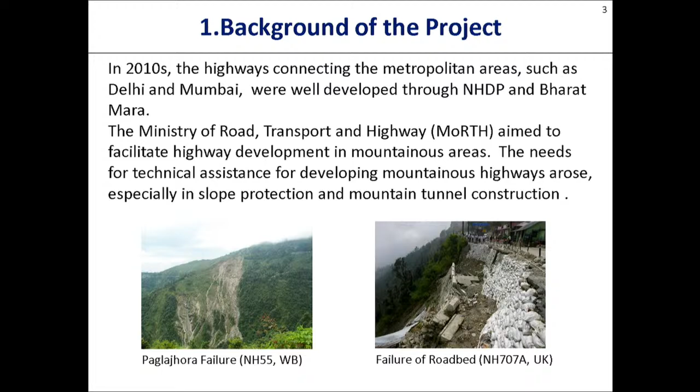This is the abstract of the previous project. Name is Capacity Development Project of Highways in Mountainous Region. Duration was 6 years, from April 2016.

That was extended by 1 year due to the pandemic of COVID-19. The project was implemented by JICA and MORTH, Ministry of Road Transport and Highway, as a technical cooperation for development of mountainous highways. In total, 17 JICA experts were involved along with Indian counterparts, and I was team leader of this project as well.

We developed 5 guidelines for development of mountainous highway roads in India, and we also implemented model activities, including seminars and pilot projects, in 3 hill road projects.

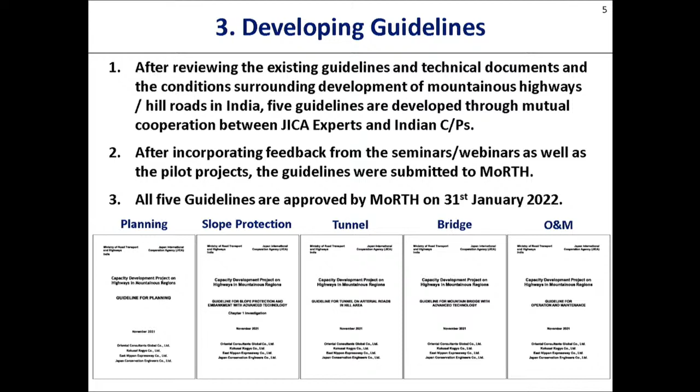These are the guidelines we developed with our Indian counterparts. After reviewing the existing guidelines, technical documents, and conditions surrounding development of mountainous highways in India, 5 guidelines were developed. After drafting, we had a series of seminars and webinars to collect feedback from the Indian side, and we submitted the guidelines to MoRTH. All 5 guidelines were approved by MoRTH on 31st January this year.

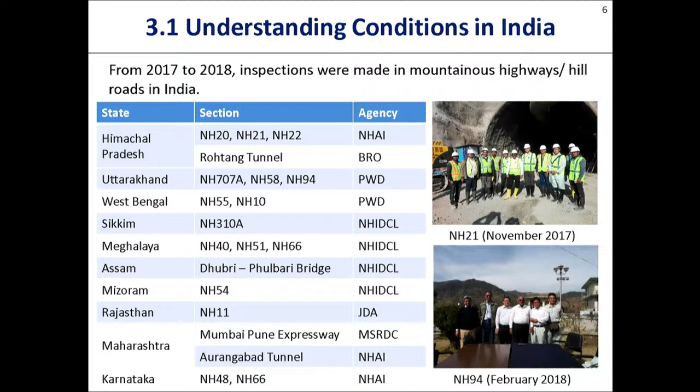JICA guidelines include essential technology for development of resilient mountainous highways, grown in the disaster-rich nation of Japan. We have earthquakes, tsunamis, avalanches, and volcanoes—many disasters. So our technology incorporates a sense of disaster-resilient design.

The first one was the planning guideline, aimed to improve existing guidelines, especially on alignment design as well as drainage facilities. The second guideline is the mountain tunnel guideline.

This aims to introduce reinforcement works to counter the fragile and complex geological structure in the Himalayan region. This guideline highlights rock mass classification for tunnel support design for the NATM method, and also focuses on guidance on safety precautions and tunnel facilities, including lighting, ventilation, and electric systems.

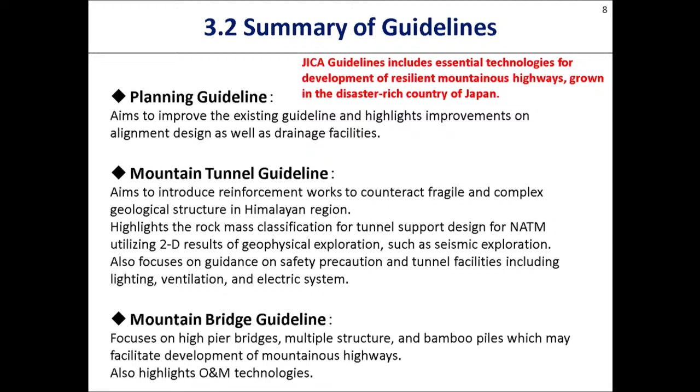The third is the mountain bridge guideline. This focuses on high pier bridges, multiple structures, and bamboo piles, which may be used for highway development.

The fourth is the slope protection guideline. This guideline aims to supplement the existing guidelines in India, focusing on slope failure and landslide issues along hill roads, especially study and investigation for design of countermeasures. This guideline highlighted countermeasures against sinking sections, especially for gravity deformation bedrock slopes, which are considered one of the major causes of sinking hill roads.

The fifth guideline is the operation and maintenance guideline for mountainous highways. This shows guidance on operation and maintenance, highlighting inspection of roadside structures, standard thresholds for operation and maintenance, arrangements and operation of disaster prevention facilities of tunnels, and the concept of an early warning system for pre-closure of roads as a precaution against disastrous weather conditions.

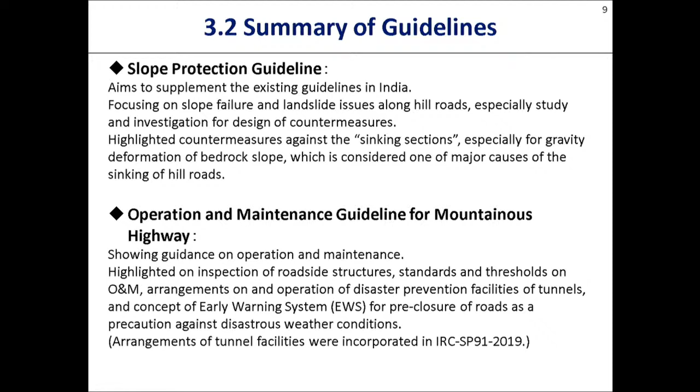Among the 5 guidelines, today I'd like to focus on 2: the tunnel guideline and the slope guideline. For the tunnel guideline, when we prepared it, there was some room for improvement in India as of 2016.

At that time, India had experience in good conditions only, and didn't have much experience with difficult tunnels, excluding Rohtang Tunnel. To counteract difficult conditions, like tunneling through the Himalayas, the tunnel guideline showed some supplemental measures against difficult conditions such as fracture zones, shear zones, and abrupt water ingress.

All of this is in our guideline. Also, design and construction without NATM theory was a room for improvement at that time, so our guideline focuses on NATM. Additionally, some problems at the portal zone were observed at that time, so our tunnel guideline focuses on portal issues as well.

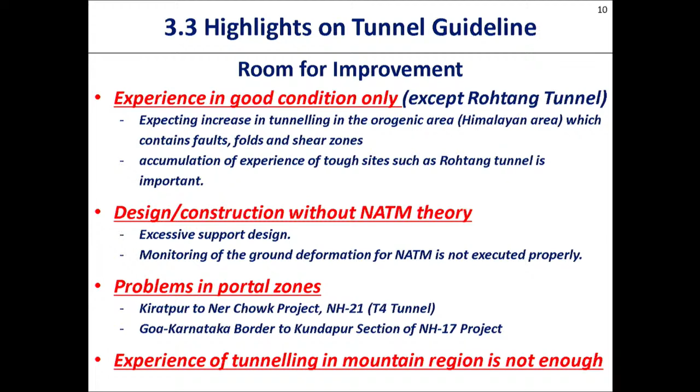And the tunnel guideline also includes safety and health during tunnel construction issues. So during tunnel construction, there are some problems on the left-hand side and measures to be taken. These measures are also included in IRC SP 91 2019, but our guideline has more details, especially for the red-colored part, like safety inspection, emergency operation plan, and labor education.

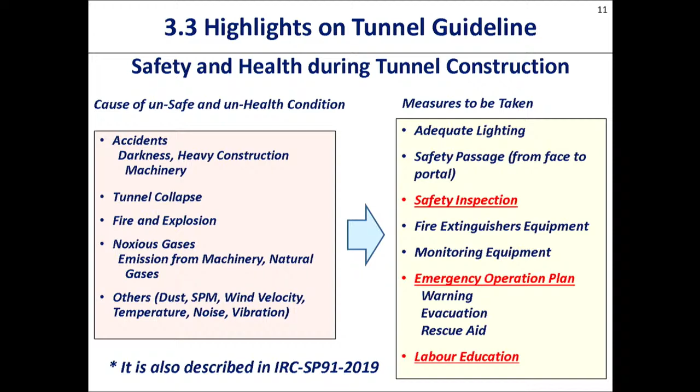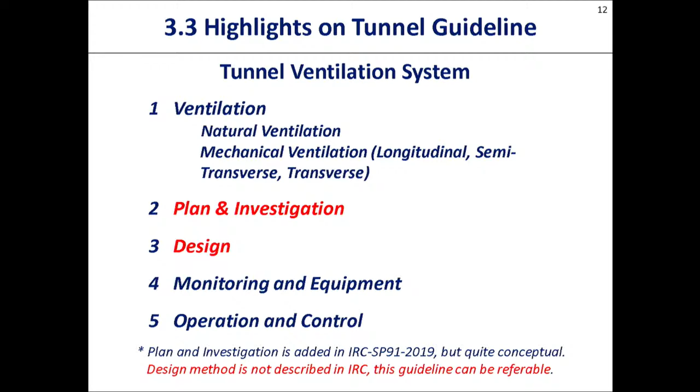Our JICA guideline also focuses on tunnel ventilation system, and these ideas are also included in IRC SP 91 2019. I think this is for the tunnel guideline's design method, and IRC SP 91 has the concept of these ideas, but JICA tunnel guideline has more detail, especially for design method. So I think JICA tunnel guideline will be a very nice supplement for IRC SP 91.

Okay, I want to explain about the slope guideline. JICA slope guideline is another important guideline among those we prepared. Actually, JICA experts came to India from 2016, and we found Indian hill roads are so challenging. We think the reason why you have such challenging roads is...

Yes, you have the Himalayas. The Himalaya is a very special condition, including the forefront mountains. This is a very specific, particular condition we can see only in India.

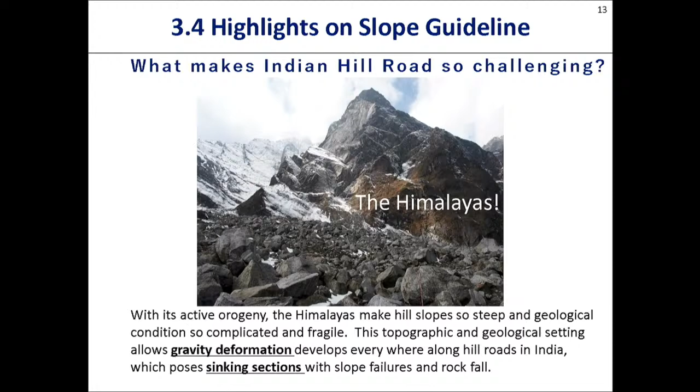And through the site survey, Indian counterparts told us that you have a sinking section, a very difficult part in operation and maintenance of hill roads. Then we looked through the hill road and proposed that gravity deformation of rock slope can be a cause of sinking section. Due to gravity deformation, there are so many slope failures, not just at the sinking section. That is what we propose in the JICA slope protection guideline.

This is just a summary of the contents of the guideline, actually features of the guideline. The JICA slope guideline adds new technologies to the existing guideline, as additional supplementary information for India. Gravity deformation is highlighted because we think it's a major cause of sinking section.

Conditions for slope stability analysis are detailed for various types of landslide. This is another interesting part in our JICA slope guideline, but I don't touch this point today - please check our JICA guidelines. Then concrete crib works and horizontal drainage borings are highlighted. These are new technologies from Japan, and this technology was tried in a pilot project in Sikkim.

Especially, we focused on investigation and study for design, because in India you have good consultants and good contractors who can make good roads already - construction-wise no problem, design-wise no problem. But we think the Indian road sector might want to improve the survey and investigation of hill roads.

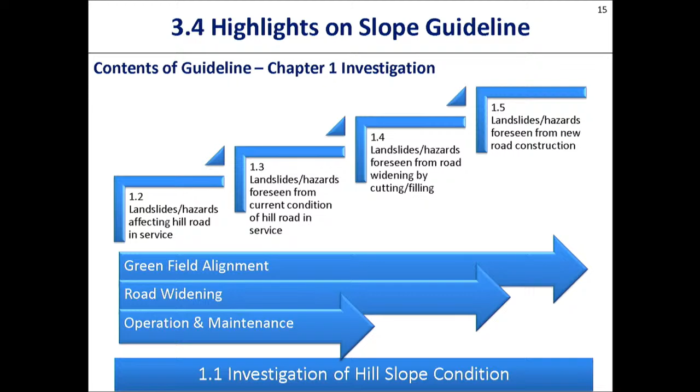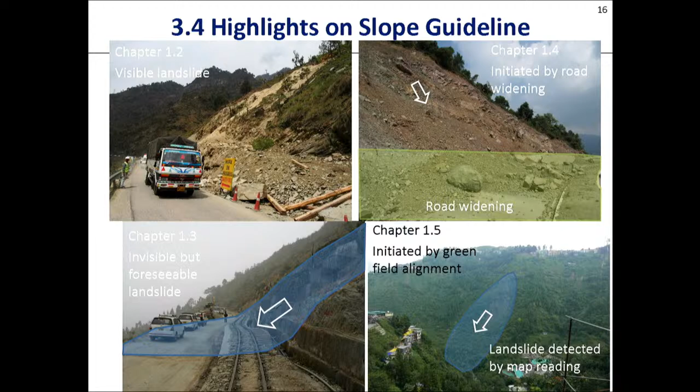Now I want to touch on sinking section. The very first time I came to India for this particular project, we had discussion with the Indian counterparts, and most of the engineers told us sinking section of hill road is a problem. We looked into what sinking section is, and we think gravity deformation of bedrock slope is one of the major causes of sinking section. So a pilot project was implemented for NH54 and 717, including investigation of gravity deformation.

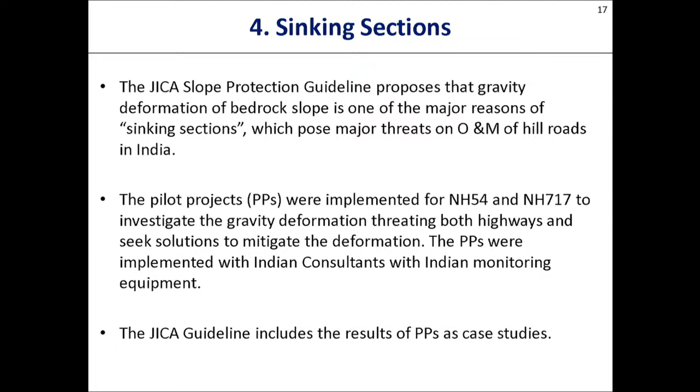We try to seek solutions to mitigate gravity deformation, because gravity deformation is a very new phenomenon to Japan as well. Even in Japan, we have not yet established the investigation method or countermeasure method against gravity deformation. So we try to seek solutions with our Indian counterpart in this particular JICA technical cooperation project, and our trial and error was recorded as a case study of the project and included in the JICA slope guideline.

Next, please. I want to explain what gravity deformation is and why hill roads sink. Gravity deformation is sometimes called gravitational deformation of rock slope, and that is a phenomenon where a rock slope with very steep bedrock...

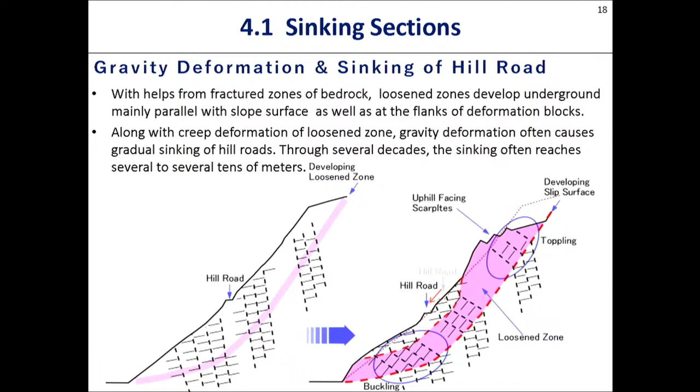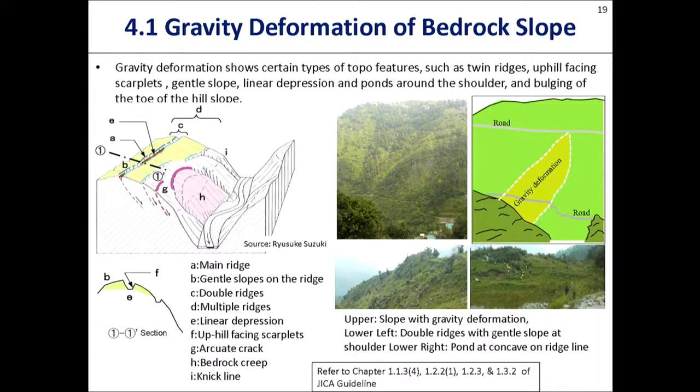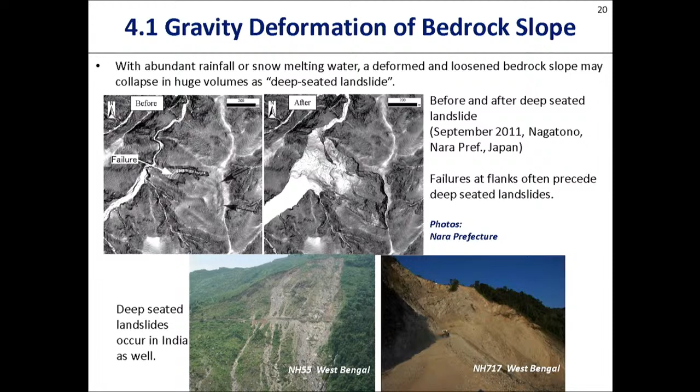Next, please. We prepared a reference on gravity deformation in this particular project, and we added this reference to our JICA slope guideline. We collected study results from Japan regarding gravity deformation, because we tried to explain what gravity deformation is, and shared the latest study results from Japan with the Indian side. This is attached to the JICA slope guideline as appendix 2 or 3.

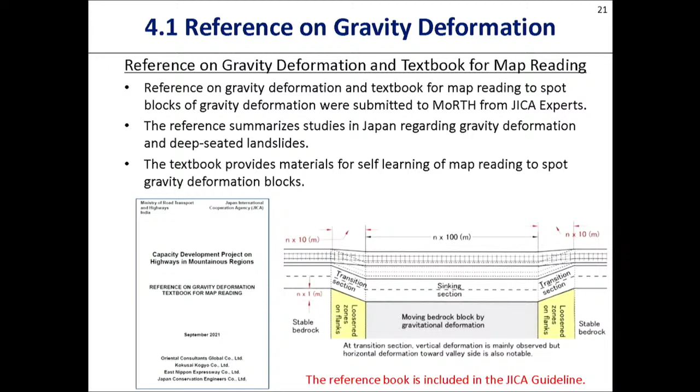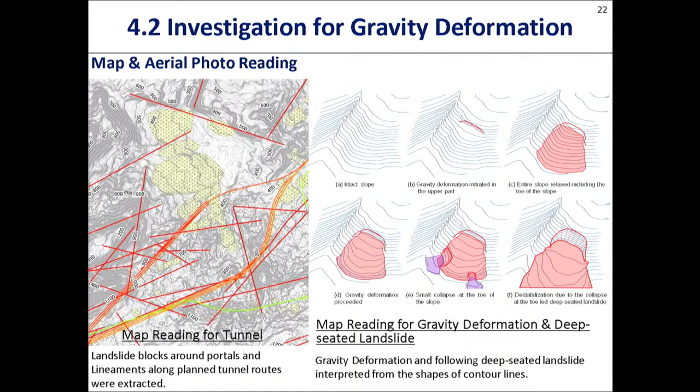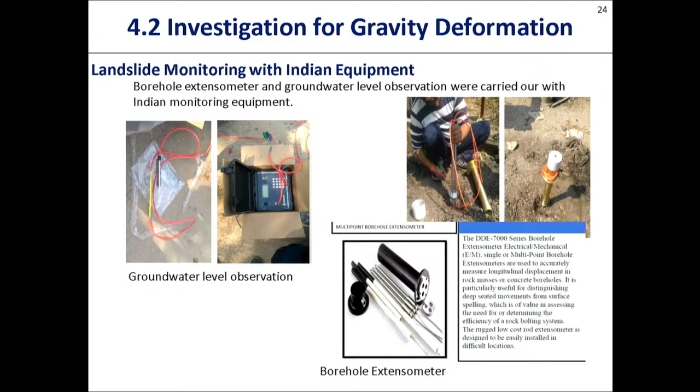And monitoring was also done. This is also very simple monitoring for detecting gravity deformation, and this is also included in the JICA guideline. The monitoring result - this slide explains the monitoring result - this is very essential information for the design of countermeasures.

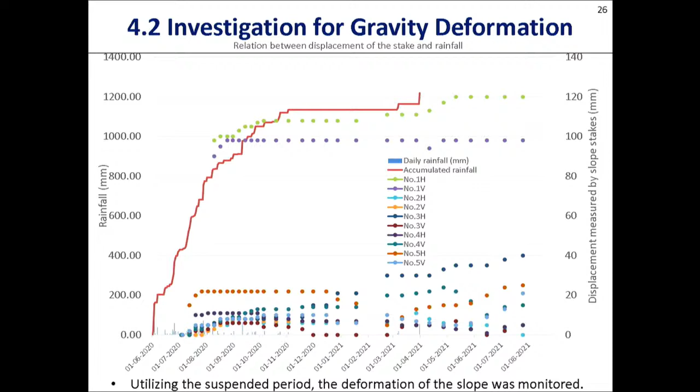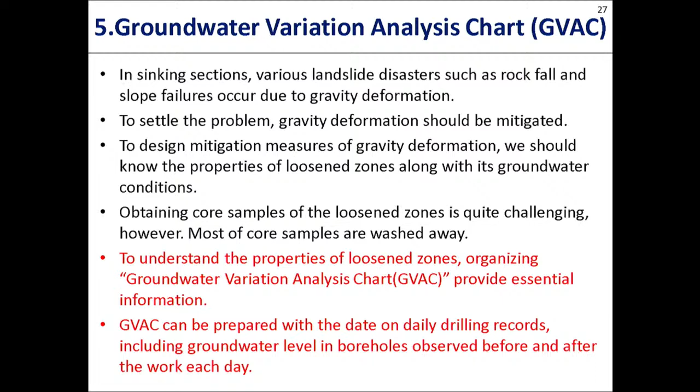But with this method, GVAC, you can estimate the condition of the loosened zone by observing the groundwater level every day, every morning and every evening of the working day. Next, please. This is an example of GVAC used in Japan, shown in our guideline. Next, this is a GVAC prepared by an Indian consultant based on our guideline - they themselves prepared this.

We give some suggestions, some advice, but they prepared this. So with this information, we can do some design for countermeasures against gravity deformation. This is very good, nice work by the Indian consultant.

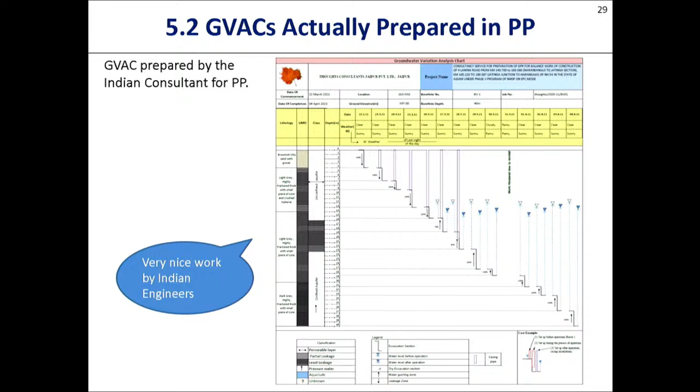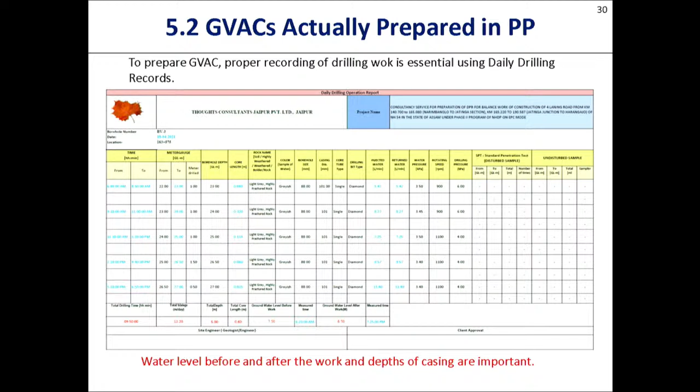So we requested the government to extend the borehole length to detect groundwater level, because detecting groundwater level is essential, very crucial, to understand the loosened zone. So the company drilled further to get the groundwater level. Such control of drilling is very important to get this GVAC for the design. Thank you so much.

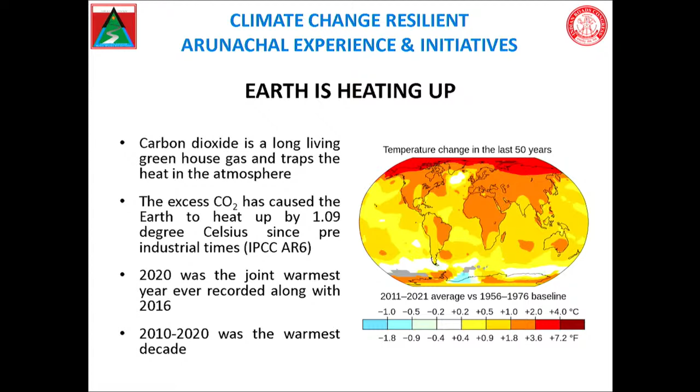Next please. Looking at the northeastern states and climate change, we've been observing that rain is the major source of water here, and glaciers are not common. The rainfall pattern, especially during monsoon, keeps changing. Over the last 22 years, rainfall has been below normal, with intermittent rain, high rain, and cloudbursts.

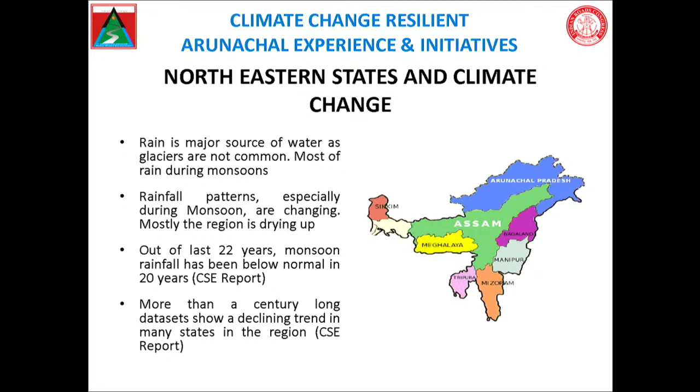If you see the CSE report, some districts show very high rainfall, but most districts across the whole northeast show a decline. Looking at over a century of data, it shows a declining trend in many northeastern states.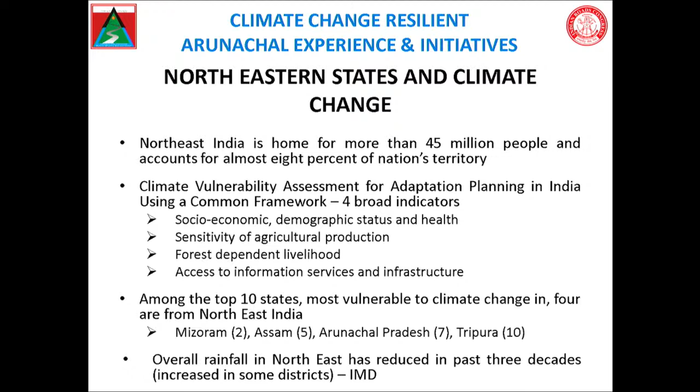Next please. Looking at the climate of the northeast, the rainfall pattern has considerably changed. There are periods with no rain, basically drought. Temperature is rising, rainfall intensity is increasing, there's a reduction in temporal spread, and winter rain - the northeast monsoon - is declining. The soil along the Brahmaputra is mostly sandy, and water retention capacity is low.

This creates a fear of scarcity, and the government is also thinking about and working on that in the whole northeastern region. The drying of mountain springs, as per the Niti Aayog report, shows 200 springs are directly the primary source of water for mountainous villages, and they are also gradually drying up.

If we see the mountain regions, Sikkim has over 94% of villages with mountain springs. In Meghalaya, Mizoram and Manipur, considerably 55, 54 and 54%. And Nagaland and Arunachal have around 44 and 37.3%, because we are dependent on that.

So if the springs are drying up, we will have a big problem for the water supply and all. So we have to also look forward to how basically we can ensure these sources continue to be there, so that we can tap and harness the water.

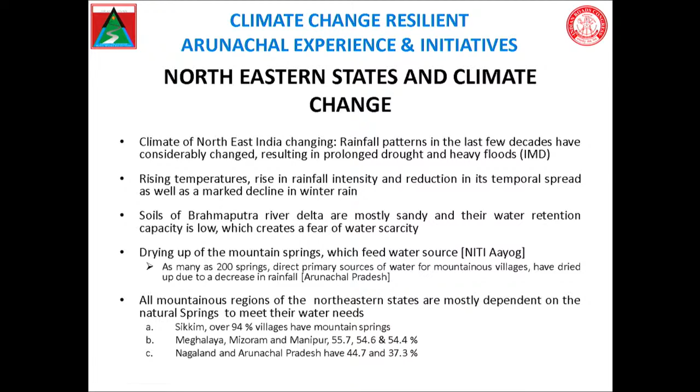When we look at Arunachal and climate change, these are some of the threats I have just described. We rank 7th in high vulnerability among Indian states. We have increasing frequency and high intensity of extreme rainfall, which I have just mentioned, and recurrent landslides, very common now.

In fact, last week there was a very heavy landslide in the central part of Arunachal Pradesh where we have a lot of damage taken place. Heavy soil erosion, flash floods, and of course the adversity impacting the overall economy of the state.

We have frequent droughts, and 26% of our GDP from Arunachal Pradesh comes from climate-sensitive agriculture. This is a very important aspect for the threats and vulnerability. 77% of the rural population directly and indirectly depends on agriculture production in the state.

When the temperature also rises, there are implications for water resources, agriculture, forest ecosystems, and infrastructure among others, as per our NECCAP report, which is being worked on under the Ministry of DoNER. We have some strengths which I have highlighted here.

We have the largest forest cover, and the largest carbon stock, which is 1023.84 million as per the ISFR report. We have huge hydropower potential of 57,000 megawatts; 815 is already operational, and 2600 megawatts is under construction. Arunachal has also aligned its state budgetary allocation with the Sustainable Development Goals described by the UN.

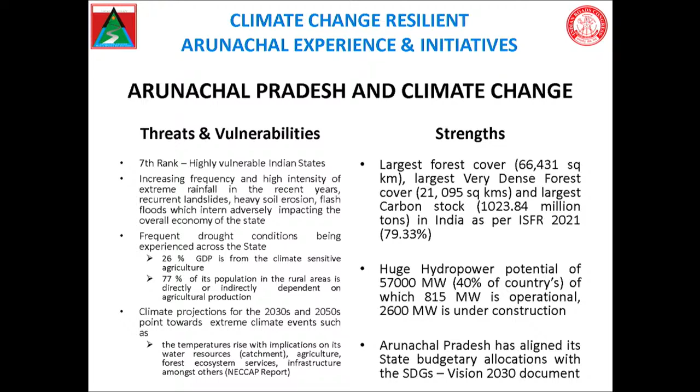So these are also basically what we are considering if we see the Vision 2030 document. Now coming to one of the districts, Pakke Kessang, which is in the central part of Arunachal Pradesh - what are the changes that have taken place?

Microclimatic changes - we see the Pakke Tiger Reserve in Seijosa, where sand and boulder mining is going on. The Pakke river width has increased after a devastating flood.

There are some more rivers which have been meandering, and their width has also increased - they were earlier flowing around 5 to 10 meters, now they have gone to 20 to 30 meters. So they are all damaging nearby villages, habitation, agricultural land - everything. This is another main concern for all of us.

Many rare species, like the Blyth's kingfisher, are dwindling and not available - this is also the impact of climate change. The movement of elephants within the reserve corridor has been changed. We have been observing the elephant corridors - different corridors are there, but they are being changed because of various factors, including deforestation and all.

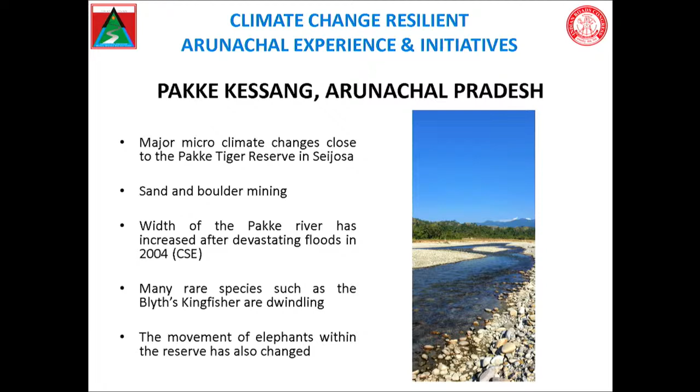Another district called West Kameng, in the western part of Arunachal Pradesh. When you travel to Tawang, there is this district, West Kameng, and construction of a highway in the district has affected the health of springs.

There are human interventions, and 10 springs from the foothill areas called Bhalukpong at the Assam-Arunachal border, up to Morgung village in West Kameng district, had dried up. And what are the reasons for that? The reasons we are explaining, and climate change is one of them.

Singchung village is witnessing some major changes to biodiversity and climate indicators due to climate change. This is what we are observing. This is one village where we keep on observing, and I have also kept visiting these areas.

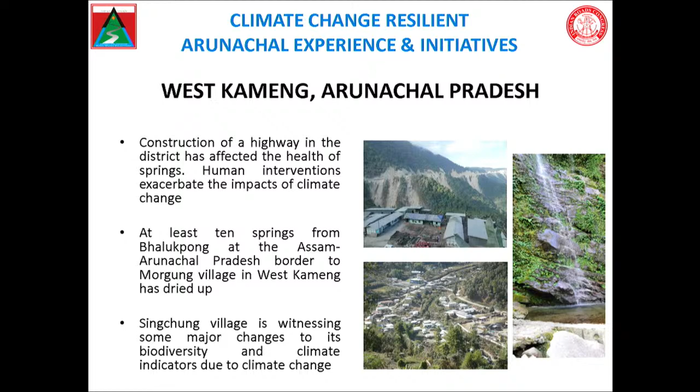Now, what infrastructure is at risk? What I've been talking about yesterday in the inaugural function - we have all talked about the infrastructure and why it is at risk, and how possibly we can take care of this infrastructure.

The roads, bridges and culverts, which we have been discussing and deliberating here in the 3-day IRC conference, are the most susceptible to increased runoff during major storm events during the monsoon rain. Intensity is increasing. Structure failures are there because of washout, plugging, overtopping, diversion, scouring - all these are happening. So our structures are failing.

Why are these failing? We are also studying and looking into that. But what is the reason for that? How can we plan so that these structures can remain intact?

In fact, the pavement aspect, which Dr. Swami is talking about - I am not covering all details for that, because Yoshinori has already covered some of the design features, and Dr. Swami is also talking on pavement design in climate resilient technology. So I am not covering those topics.

Now, why road planning and management? We require good transport planning as well as good design, which minimizes the impact from climate related storms. This was also highlighted yesterday by the Honorable Union Minister, Surface Transport. A detailed DPR, which is a critical step, is the most important part of comprehensive project planning and development when we do the planning for road construction and bridges.

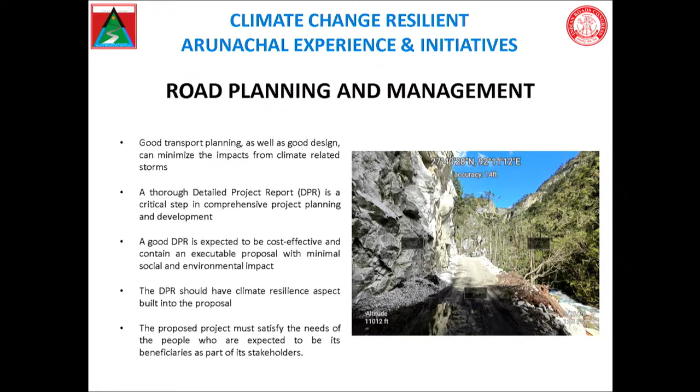Now, when we look at road infrastructure planning, we also have to look into social and environmental sustainability. One advantage - this has already been deliberated in one of the UN conferences - is the concept of flooding where structures need to be replaced based on the concept of build back better.

So when these kinds of floods occur, we look into all the structures and make them suitable to take care of all the effects of climate change in the future. This is one of the concepts deliberated and discussed in one of the UN conferences - the opportunity should be taken to improve the local infrastructure whenever it has to be replaced.

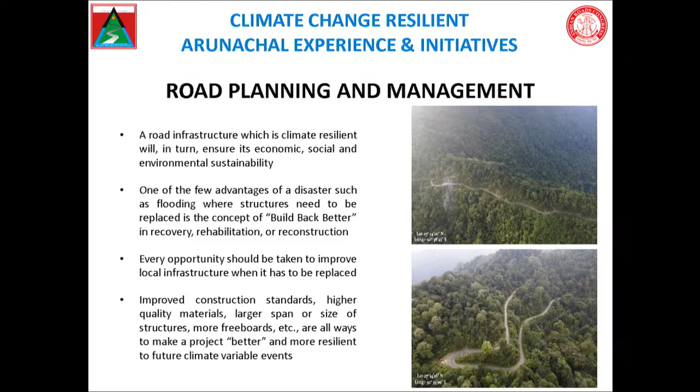Whenever we replace, we have to consider all the data, which Mr. Yoshinori has also explained in his presentation - improved construction standards, higher quality material, larger span and size of structures, freeboard, etc. All these are basically to make a project better and more resilient for future climate variable events. These are some of the factors to take into consideration, including local knowledge of the area, which is very important.

Talking of slopes, which Mr. Yoshinori has also explained in detail - slope stability is a very big issue in hill areas, in complex terrain, where we have fragile geological conditions and complications of fragile hills. Slope failures are occurring due to limited site investigation, substandard slope assessment practice, and vulnerability of the slope to adverse but unseen geological features and hydrological conditions. This is also very important.

Why have we been talking about local knowledge? Because when designing a culvert or a bridge, we have to take into consideration the local water passages during rainfall - the areas where water makes its way through the hills, where it accumulates, and how much water is able to collect in one particular place. This needs thorough investigation and more robust design, particularly when a critical slope is there, and where there is a history of instability or a sinking zone, as Mr. Yoshinori was talking about.

Now, when we look at rainfall, the rainfall intensity for different durations should be considered as a new reference for design - rainfall intensity, slope stabilization and drainage. This is important because when we look into the rainfall data, we have to consider the high intensity rainfall, like what has happened this year over the last 6 months.

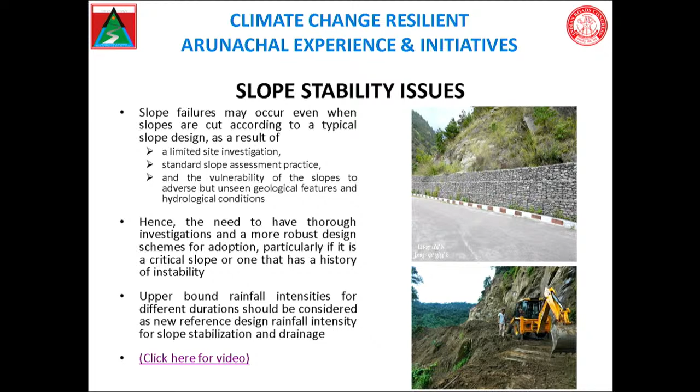That's why we are looking for climate resilient technology when it comes to slope stability, and how we can stabilize the slope.

Now, what needs to be done is more wide-ranging, in-depth research into the impacts of climate change, which the Honorable Chairman mentioned in his opening remarks. Yesterday it was also mentioned by the Honorable Minister and Honorable Chief Minister. A study of the combined impact of climate change and human intervention, especially regarding drying mountain springs and all, which I have just mentioned.

We will require more meteorological stations across the hills and mountains so that we have more data from different pockets. That is required. So we need equal distribution of meteorological stations which can collect the data. Adaptation strategy, particularly involvement, building resilience and adaptation to the changes taking place.

We have to have a strategy for that, we have to plan for that, where we are working. Traditional knowledge held by the local people should be combined with modern science and technology, as I've just mentioned. So this local knowledge has to be considered, very, very important when we are talking of the latest technology. Now, what initiative has the Arunachal government taken?

The Arunachal government is one of the first states in the country to adopt a climate change resilient and responsive Arunachal Pradesh plan, by the name Pakke Tiger Reserve 2047. In fact, the whole cabinet was there, and the Union Minister for Environment and Forest was there in Arunachal. They held detailed discussions, and we adopted it, named Pakke Tiger Reserve 2047.

By that time, we have to achieve the target of net zero emission, which the Honorable Prime Minister declared at COP26. So this is our target for net zero emission by 2047. This declaration was notified on 2nd December 2021 by the Government of Arunachal Pradesh. There are 75 strategies in that declaration proposing a way forward for climate resilient Arunachal Pradesh. The 75 strategies also symbolize the 75th year of India's independence, the Amrit Mahotsav. One of the strategies is a sustainable transport system, covering all roads, bridges, and infrastructure for the transport system.

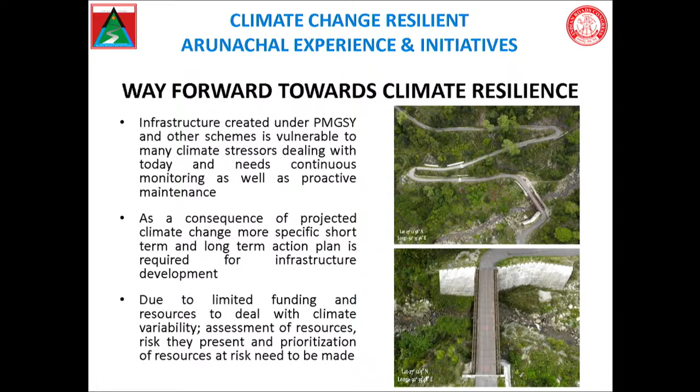The Ministry of Rural Development, NRIDA, has also brought a very beautiful book, with a lot of discussion, the Vision Document 2022. This contains all the new technology, a very useful document for dissemination to all stakeholders, and it will address most of the issues related to carbon emissions. It also evolves environmentally optimized and climate resilient design for rural roads, which is also important.

There is a book written by Mr. Bill Gates, How to Avoid a Climate Disaster. After a decade of study, he has come out with this book, describing how we have to adopt various measures. He said two important things: one is 51 billion to zero. 51 billion tons is the carbon being added every year to the whole world, the whole globe, and how we can bring that to zero.

This is the important target which the Honorable Prime Minister says we have to bring emissions to zero, net zero. So we have to bring 51 billion to zero, and we are looking at how the author has comprehensively described various measures for that, some of which we are already adopting.

We look forward to having good climate resilient technology and carbon reduction emission. By 2030, probably we will be reducing by 1 million tons of carbon emission, and maybe by 2047 we will have net zero emission. With these targets, Arunachal is working on that. We are looking for more climate resilient infrastructure in the years to come, and we are committed to making Arunachal a climate resilient infrastructure state in the country. Thank you very much.

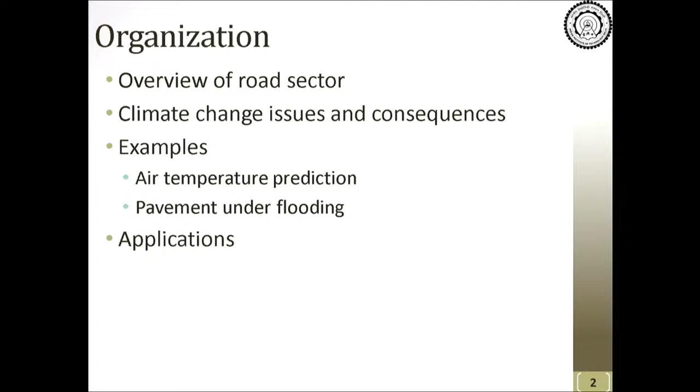In the Indian context, we really boast about really big infrastructure, starting with road length, where we stand at number 2 in the world in terms of road length. We have 6.2 million kilometers, a really big network, as per 2020 data. However, if you look at road length per unit area, characterized by kilometer per kilometer square of area, we are well below, standing at around 16th place in the world at this point of time.

Again, within this, over a period of time we have expanded our road network vastly.

Again, looking at 2020, rural roads significantly make up around 70% of the road network. National highway system is around 2 to 3%. In most of those cases, we have really good infrastructure design consideration taken into place, but with low volume roads, that's unfortunately not the case. If you look at paved versus unpaved roads, around 60-65% are paved roads at this particular point in time.

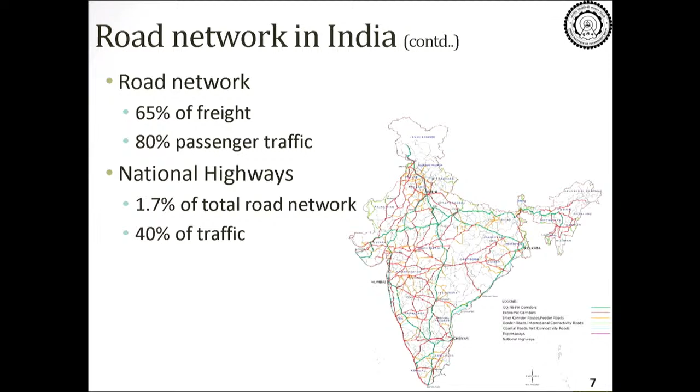So that's where, essentially, 25 years back we started expanding our national highway system: north-south, east-west corridor, looking at 7,000, 8,000 kilometers, and the golden quadrilateral again around 6,000 kilometers, which we intended to build.

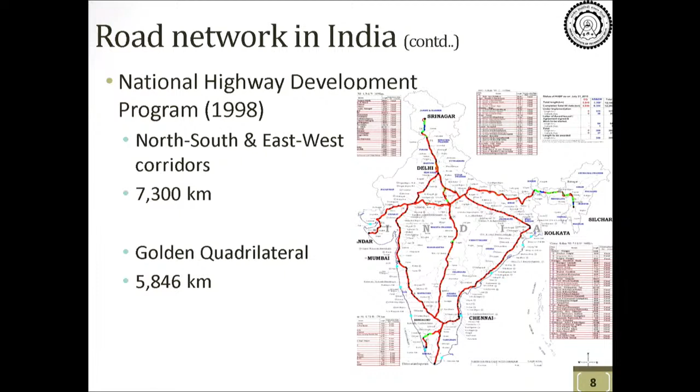However, even at that particular point, there were several studies documented that India needs to invest a lot of money, back in 2009. Now, if you look at the current investment over the past 8-9 years, we have surpassed whatever estimate we had. We are definitely emphasizing and putting a lot of money into the highway infrastructure in place.

Now with that, recent updates are the Bharatmala project and Sagarmala project. Basically we are looking at connecting hinterland with all border areas and coastal areas all together.

That brings to issue the site-specific conditions where climate comes into picture, followed by material properties. We often need to get materials from borrow pits or other locations, which will have the database. Using those inputs, we come up with trial sections, like cross sections which might work or might not work, based on experience.

Then we use pavement analysis software, like the classic one, IIT Pave, to get the stress and strain at different critical locations. Using those stress and strain values, we predict the distress, and the number of fatigue cycles and rutting cycles the pavement can sustain before it fails for the design period. That's essentially the damage accumulation part, and then we look at whether, at the end of the design life, 25 years or 15 years, it's going to meet the requirement.

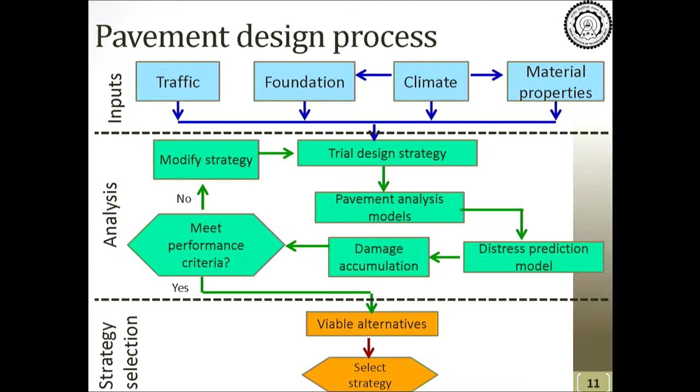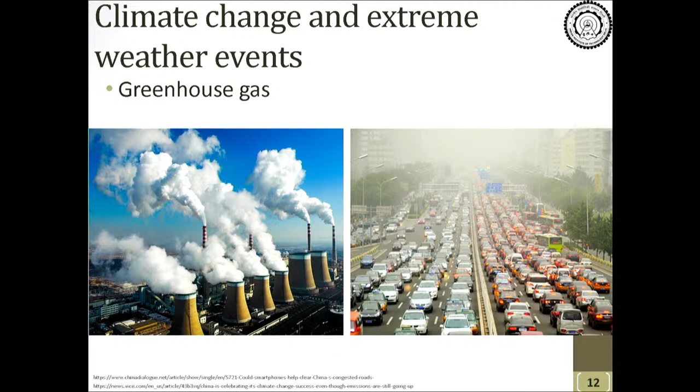That brings the issue of climate change, where we have to be a bit careful. This goes back to various issues in terms of greenhouse gas emissions, with principal contributors starting with industries, and transportation sector itself being a significant contributor, leading toward subsequent issues and climate change.

What we are looking at, in a really grim scenario with this climate change, is that things are not so good, which we do expect, and which we need to work further to address.

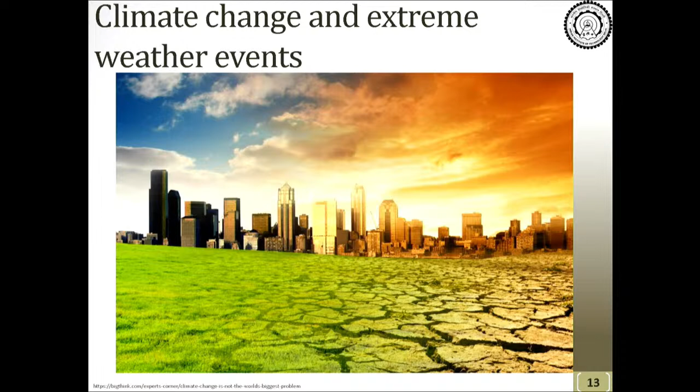If you look at the Indian context, we have the Himalayan region with snow-capped mountains up north, and down south we have the coastal belt. With that, we can expect melting of ice, sea level rise, hurricanes in the coastal belt, and heat waves for sure.

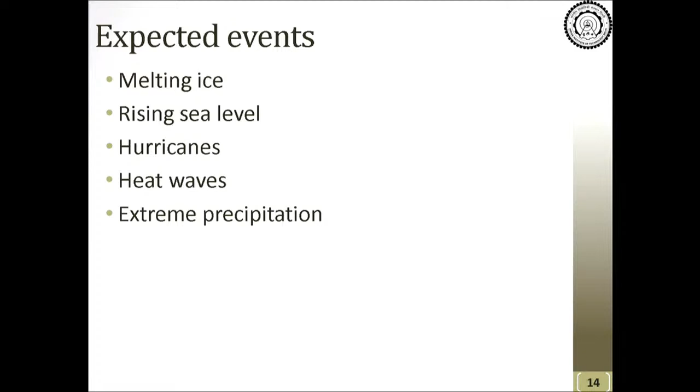Overall, we are seeing a rise in temperature, and of course extreme precipitation, with significant rainfall within a short period of time. These are the macroscopic issues we can look at.

As a consequence, it's going to disrupt the overall system. It's not just the pavement network or transportation network—it's going to disrupt water supply, whether natural or man-made, the electricity grid for sure, and the transportation network, but not least.

Now, once we are expecting something to happen, that means we need to take steps to get over those issues. Once we know we are expecting something, what best can I do to get over that particular scenario, and have my system in place? That's the adaptation part which comes into picture.

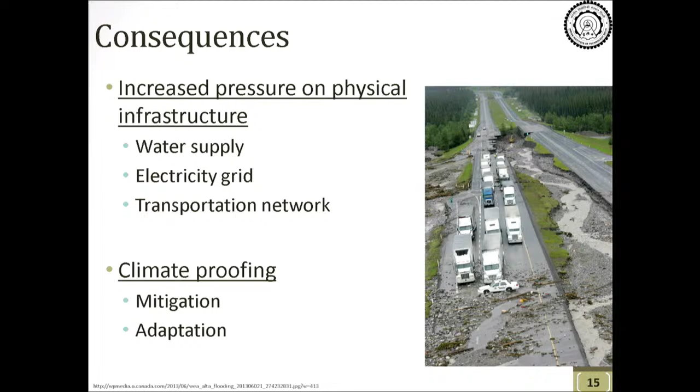First and foremost, if you look at the snow-capped Himalayan mountains, due to pollution issues we have aerosol matter flying and reaching the upper caps of the Himalayan region, which are typically dark in color. As a consequence, these materials, once deposited on the snow, absorb heat, and we are seeing a rise in temperature in those Himalayan regions as well.

As a consequence, we can expect flash floods due to snow melt as well as precipitation, bringing the issue of flood risk at any point in time, as we have seen back in 2013 with the unfortunate Kedarnath incident, as well as recently with a lot of landslides happening in the Himalayan region.

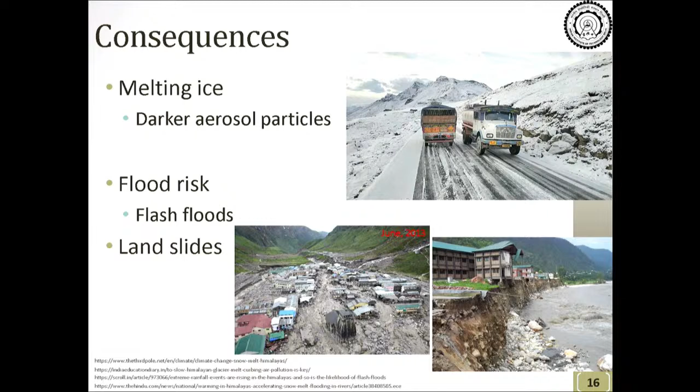With that, we have several structural measures and non-structural measures, which predominantly fall into the domain of water resource engineers.

So primarily channelization, building of additional infrastructure, dams, and so on. That's something we can do, and then of course we can have some predictive models, and then at least making people aware so they can move to safer places.

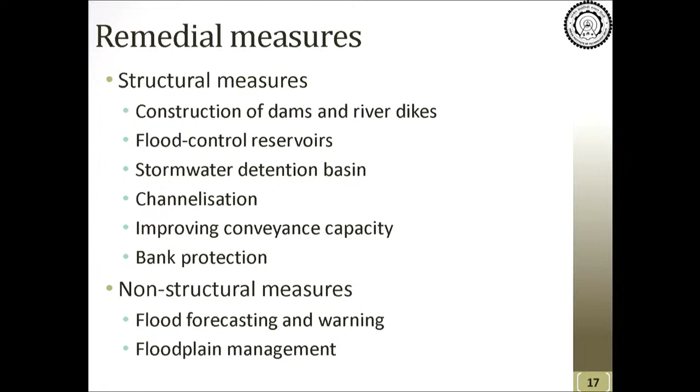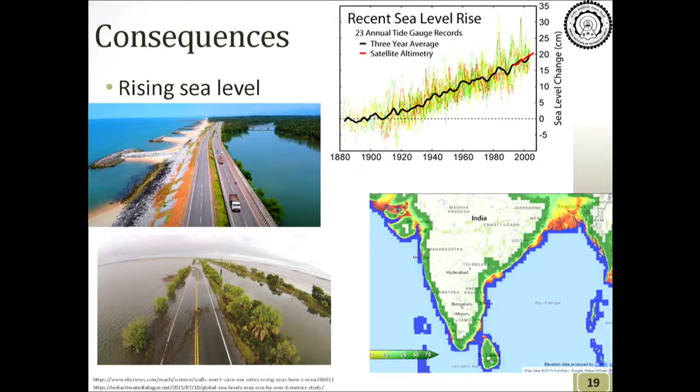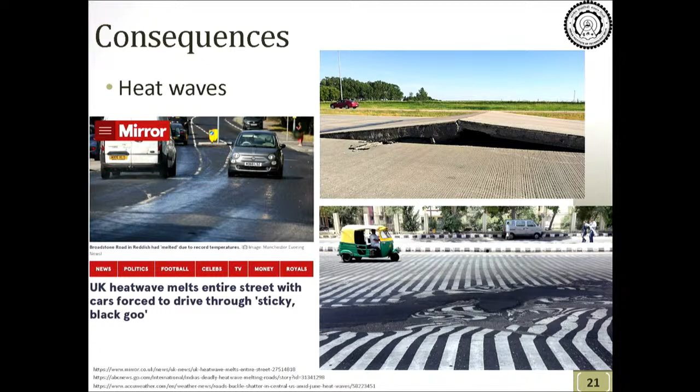Next slide please. Now with that, if you go back to our pavement design guidelines, we have our benchmark IRC 37. Once we are looking at flexible pavement, we require bitumen, so we have to go back to IS 73, the bitumen standards.

If you look at IS 73, this is a nice table that gives the link between the grade of binder you are going to use and the corresponding temperature. VG10 is supposed to be used when the 7-day average temperature you can expect is less than 30 degrees Celsius, and so on. The point being made is that we are looking at the 7-day average maximum air temperature, typically during summer, not less than 5 years from the start of the design life. So that guides us - I need to predict what is going to happen in the future.

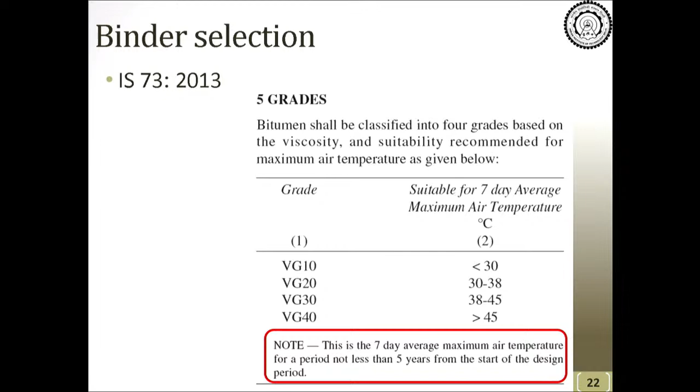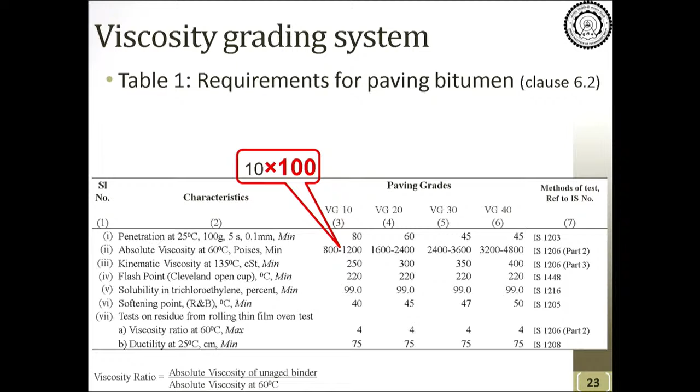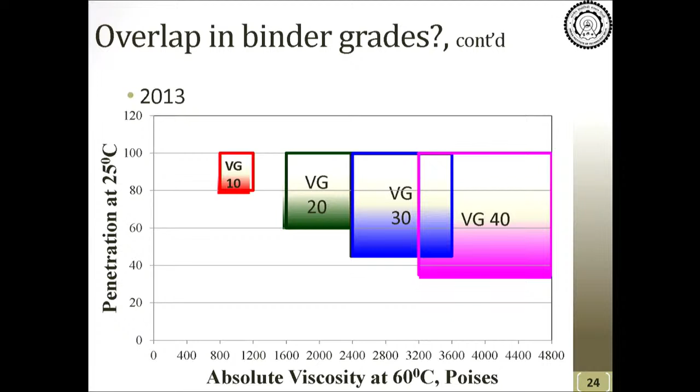Next slide please. This goes back to this particular table. We have a lot of specifications where viscosity values at different temperatures need to be used, and accordingly this table comes into picture for different grades of binder. Typically we see the values in terms of penetration and viscosity as an indicator. Higher the temperature, the binder requires higher viscosity so that the pavement stays in the right condition.

Next slide please. Now, if you look at what the US did with the SUPERPAVE specification to address this temperature issue, they collected data for more than 20 years on a daily basis, with a network of 7,500 weather stations. Imagine the kind of data used to develop these models. What they did was take the 7-day maximum temperature moving average, predicted for pavement at 20 millimeters below the pavement surface, as well as the 1-day coldest temperature taken just on the surface.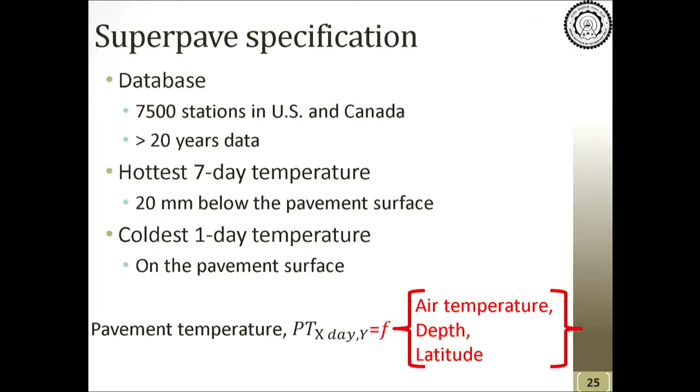That brings the issue where if I can expect climate change to happen, I need to take care of that issue to a large extent. So if I'm predicting a worst case scenario, that's going to take care of some fluctuations which are going to happen with climate change. That brings the issue of reliability or statistical analysis, where typically we know the normal distribution, which usually works: plus or minus 1 time standard deviation covers 68% of the area, and so on.

With this particular concept, what we typically do is, if I know a particular location's average temperature expected based on past n number of years of data, the average value gives 50% reliability, a probability of 0.5. If I move towards the right, say I expect a 40-degree temperature but say it's going to be 48, that means I'm giving a value which is going to happen on a rarer side, but at any given point of time in a given year, that's going to satisfy the requirement, because the temperature would be lower than that value. That's where we need to move towards the right side, which gives higher reliability.

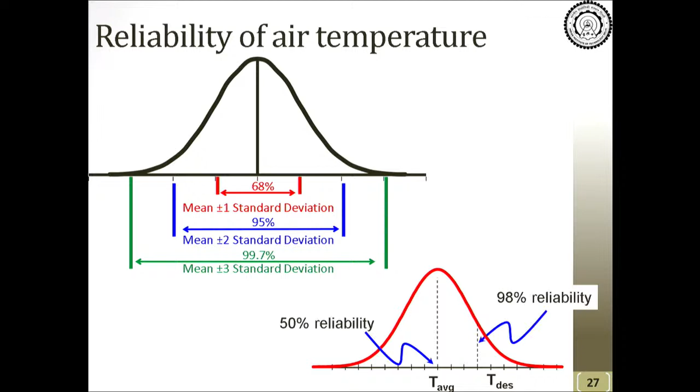Now, this was the case with the Indian Meteorological Department. They had this particular data, say 1 degree in the east-west direction, north-south direction. So they had this particular database, roughly 1 degree translating to a 100 kilometer square grid. This particular database was available for us starting from 1951 to 2013.

So if I look at the 7-day maximum temperature computed using this particular database, that's 51 to 13 multiplied by 365 days, that was the kind of data we had. Based on that, once we computed these values, we did see reasonable correlation with respect to moving from north to south or east to west direction.

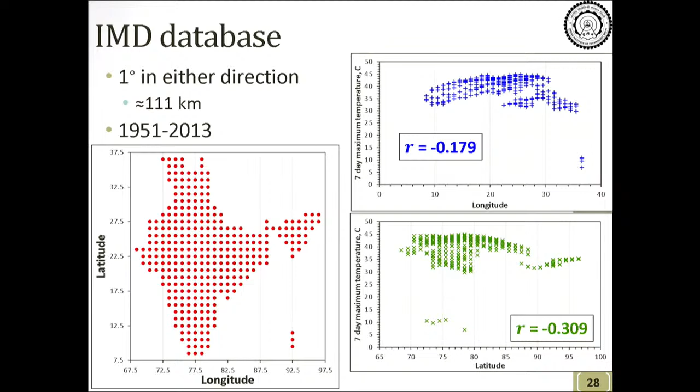Now with that, if I take these 3 cities, Delhi, Bangalore, and Chennai: Delhi and Bangalore are pretty much on the same longitude. Past 25-year data has been plotted over here. If you see, there is a significant difference, Delhi being the blue one versus the green dotted one for Bangalore. Similarly, Chennai versus Bangalore are pretty much on the same latitude, and we see that interaction happening. Depending on the location where I am, the temperature is going to be different, and we do see certain fluctuation over a period of time.

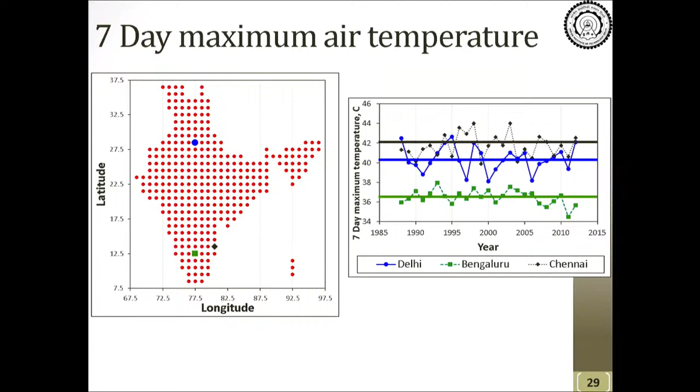So that's where the average value has been marked with these dots or straight lines. Those are the average values which we are looking at, corresponding to 50% reliability, or a probability of 0.5.

And that's where, once we move towards the prediction of these values, since I'm looking at the whole grid, I need these many locations, 31 multiplied by 31, that's the grid size we're looking at. For all these points, we resorted to gene expression programming, a machine learning based scheme where I'm looking at an optimization process to find the best possible equation itself. At the end, we would end up with an equation that anybody on site can use, as opposed to certain machine learning schemes which are computer based, meaning I'd need a computer at the end to predict the values. But here, that's not the case, and this has higher efficiency as a consequence, giving better accuracy as well.

This is essentially the overall architecture of this gene expression program. What we do is give the input, in this particular case latitude and longitude, and then the program itself is going to look for certain equations which it treats as a better solution.

So now based on those solutions, we would have a set of equations - 10, 12, 100, whatever - compare it and then pick the best one from that particular lot. Now since this is the first iteration, I need to alter this particular equation because that trial equation might not be the best one. Or it might be a case by chance that it's the best one, we really don't know.

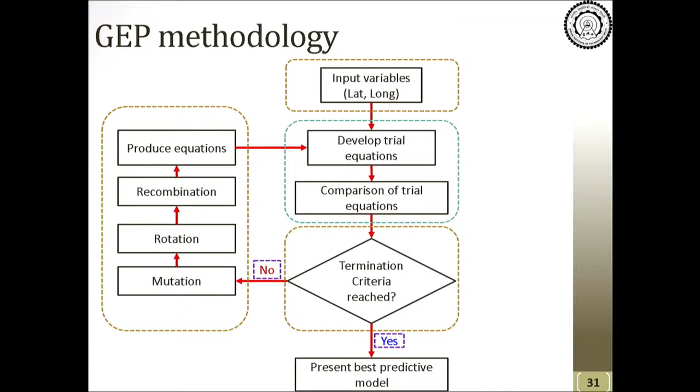So under these circumstances, what we do is go for gene mutation, rotation, recombination, so on. As a consequence, we have this set of equations, we alter those equations, then compare again. And now this exercise is going to be repeated a really large number of cycles - this can go for lakhs of iterations.

With this particular exercise, we used the high performance computing available within the IIT Delhi system. We ran it for 1 lakh iterations, which went for 2 weeks at stretch, no break in between. And after this particular case, we got this best predictive equation. That's how this algorithm will go on.

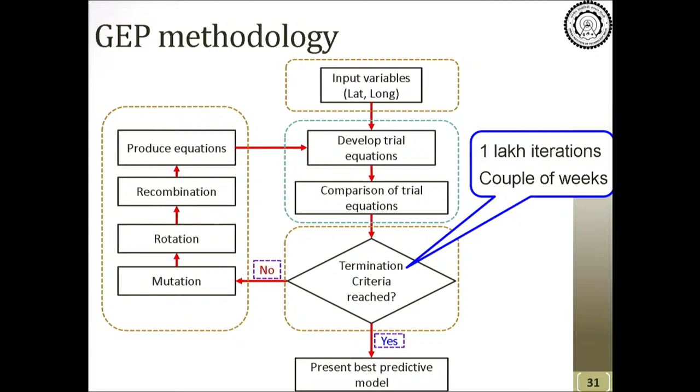Next slide please. And now as a consequence, we ended up with this particular expression. So 7-day maximum temperature, T, is going to be a function of latitude and longitude, indicated by Lt and Ln. K1, Ki and Ci are the regression coefficients. And now again, this is dependent on several other factors.

With that, once we had this particular model, we looked at the coefficient of correlation, that's the Pearson coefficient, and R square and adjusted R square values, which were reasonable enough for this given data set, acceptable under the circumstances.

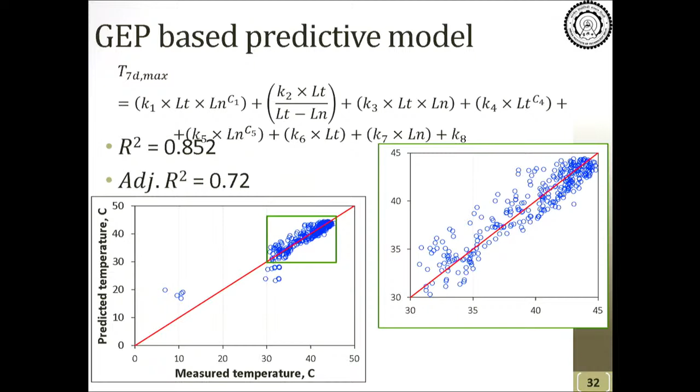That's shown in this plot - the measured values, 7-day maximum, on the horizontal axis, and vertical axis gives you the predicted temperature. The smaller inset graph shown on the right side shows most of these points are along the line of equality, that's the red line. Some scatter is there, which is expected most of the time with this statistical analysis.

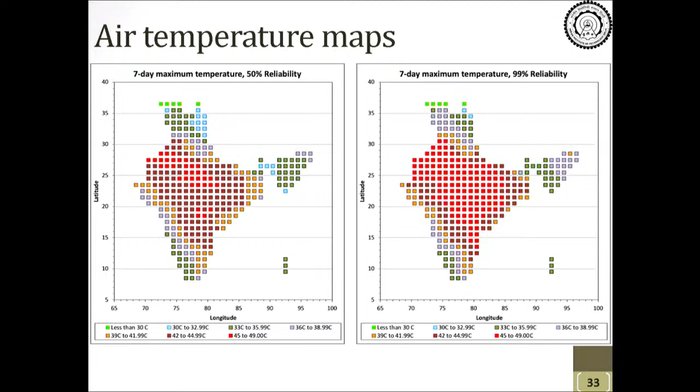Next slide please. Now the major application with this particular predictive model is that we have an expression which a field engineer can use straight away. As opposed to the case with most machine learning models, where we require a computer and all the algorithms in the backend, in this particular case you have this expression - anybody with a calculator can just find it for that particular latitude and longitude.

So depending on the project location, one can get the latitude and longitude. You just give those as input, you get the final output, which can be used to get the 7-day maximum temperature for a given reliability as well. And of course, once we are looking at a particular project, that's going to be site specific. Further, depending on the importance of the project, we can go for higher reliability.

Next slide. This is the case - if I'm looking at say a village road, it's not going to matter to that extent. If I take that particular hypothesis, then 50% reliability is sort of okay. As opposed to if I'm looking at a national highway, then I need to have a foolproof system in place, which means I need to go for higher reliability.

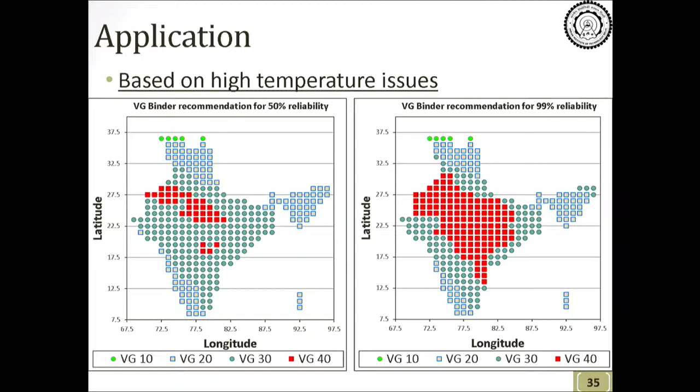Yeah, next slide please. With that, I'm going to stop at this point. Any questions, I will be happy to answer, and you can shoot me an email as well. Thank you.